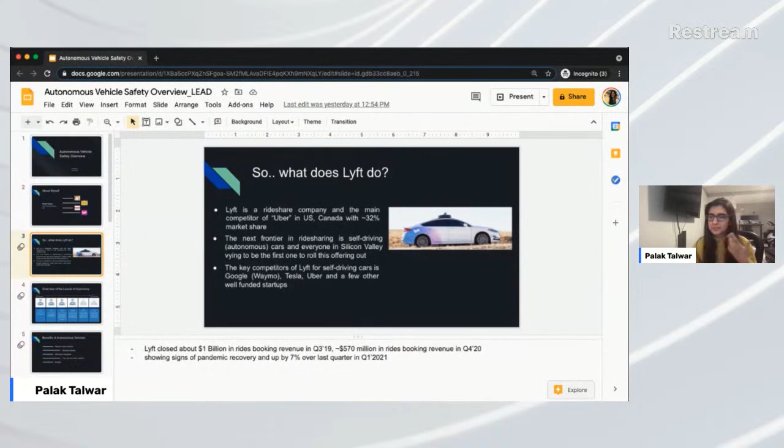Before we talk about these specific safety mechanisms and what we mean by safety, how do we implement safety, why is it important, and what key things do we have to think about for safety, I just wanted to give a little bit of introduction: what is Lyft? You might have obviously heard of Lyft. And an overview of autonomy levels, what are the different levels of autonomy, and what are the key benefits and challenges when it comes to developing a self-driving car.

So with that, what does Lyft do? The picture that you see here is actually one of the images that was released by Lyft some time back. It's a Ford Fusion hybrid, and it was released, I would say, 1 to 2 years ago. You can see that it has its own suite of sensors, cameras, lidars, radars and everything at the top. Lyft is a ride-sharing company. It started off as a ride-sharing company, and its main competitor is Uber in US and Canada.

In 2017, approximately, it started its own self-driving division, which is called Lyft Level 5. It was mainly focused on building self-driving technology and integrating it into different platforms, not building the car from scratch, but partnering with different OEMs, automotive manufacturing companies, and then integrating self-driving technology on top of it.

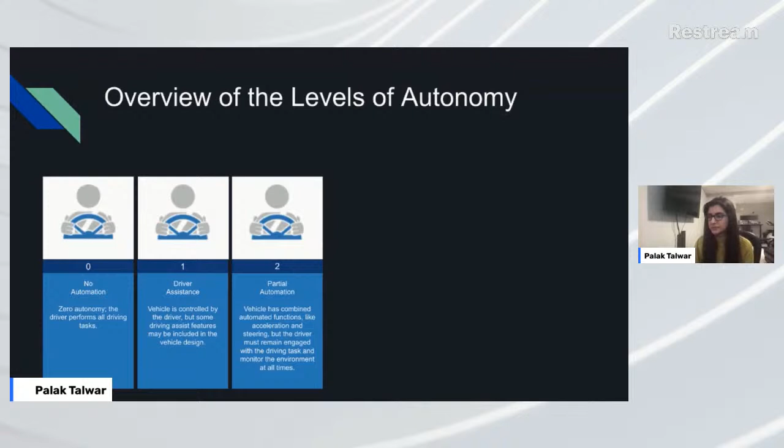High automation. The vehicle is capable of performing all driving automated functions, again, talking about steering, braking, acceleration, right? The driver has the option to control the vehicle in this case if any of the systems fail, right? And level 4 automation is a little different than level 3, because in level 4 automation, the vehicle monitors the environment in a specific ODD. When we say ODD, it's the operational design domain. It means that in a specific area or region, the vehicle is able to monitor the environment.

An example of level 4 is Waymo's Google project. For any company, for example Waymo or Google in this case, when the vehicle is ready to go on the public roads, they do a high level of rigorous testing, simulating different scenarios, to know what's the safest option in a given scenario. And when they do that, they pick a specific region or area before they commercialize it.

That area or region in which they do their testing and collect data so that they can train their system is called ODD, operational design domain. And level 4 autonomy is that: basically, you have that in a specific area or region in which you have your self-driving vehicle.

Level 5 is full automation, as you can think of. That basically is in all the areas or regions. So as compared to level 4, the only difference is that it would have all the automated functions, but in that case it would be commercialized. One of the good examples of level 5 vehicles at this moment are robotic taxis. For example, Nuro is one of the companies doing that at this moment.

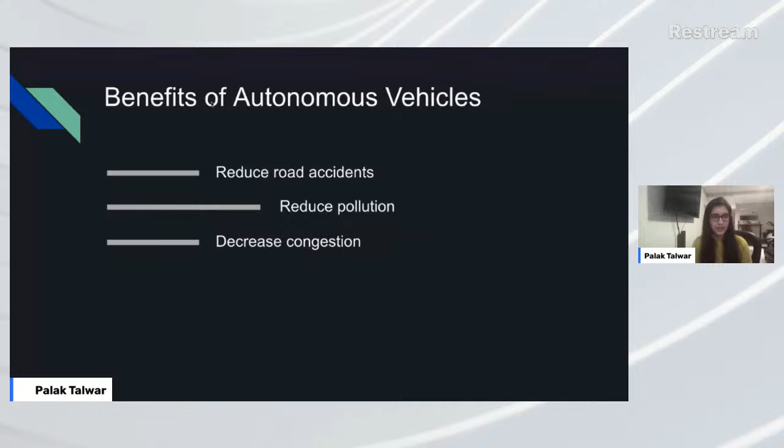Decrease congestion. Once fully implemented, a fleet of self-driving cars can significantly reduce travel time. Before this whole pandemic and COVID, I used to spend 2 hours minimum daily in traffic, one way, in California. So one of the big advantages is it's going to reduce congestion, by leveraging intelligent transportation systems that companies like Lyft use for their ride-sharing business. People can be pooled into a common ride from point A to point B, and the same car then goes to point C, picks up other people and moves on.

The other advantage would be freeing up real estate capacity. If the car is going from point A to point B picking up people, carpooling and everything, that frees up real estate capacity. Given the pressure of increasing populations around the world, especially in India, real estate is of the essence, as you would agree. If cities are built around self-driving cars, there would be drastically less need for parking spaces or parking structures. That frees up capacity that can be used for helpful infrastructure: playgrounds, parks, low-income housing, etc. Last but not least, we have mobility.

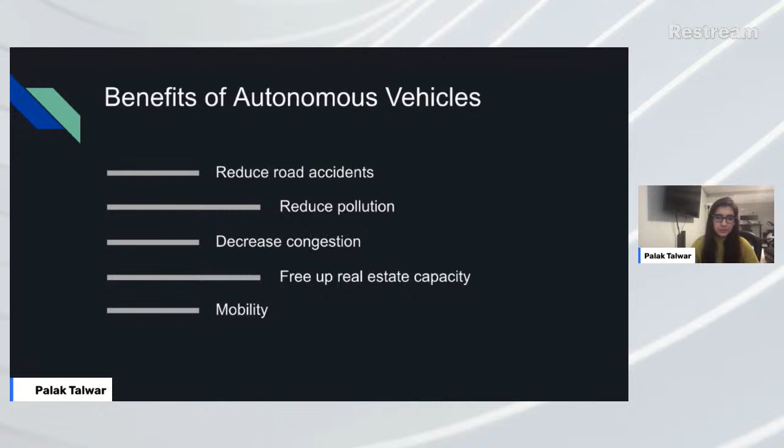So from there, we'll talk about a couple of challenges. Now, I just listed a few key challenges because I know there are so many challenges when it comes to building self-driving technology, right? But I just wanted to list out a couple here which I feel are top of the list in my mind.

One of the challenges, the first one, would be the gap between self-driving technology level and the current regulations, right? So based on the current regulations, or even based on the current infrastructure, if you talk about India itself, building a self-driving car is one thing, but commercializing or applying it in India or anywhere, even if you talk about the US, it's a big challenge, right? Because there are so many federal, local, state-related regulations that you have to be compliant with before you can release your vehicle on the public roads.

And even in this case, for self-driving vehicles, there is no such regulation at this moment because it's so new. We don't have a standardized set of regulations yet written by these organizations, in other words. So that's one of the biggest challenges that people need to think about. These first responders as well.

For example, if there is a self-driving vehicle on the road and there is an accident, then how does the first responder, which could be an ambulance or a police officer, react or approach the vehicle and gather the information from the vehicle itself, with no driver? So all of these regulations need to be in place before we start to think of commercializing this into the world.

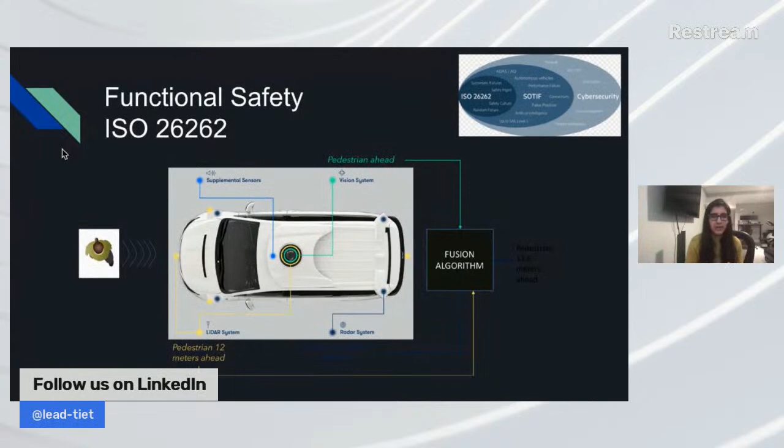It's highly possible. And then the other one, you think about how controllable the vehicle is if that happens. And that varies for different levels of autonomy. For level 2 or 3, you can imagine that there is a safety driver, and if there is an unintended acceleration, then there is a warning to the driver, and the driver is ready to take over because the driver is alert at all times. So that is maybe controllable if the driver is ready to take over.

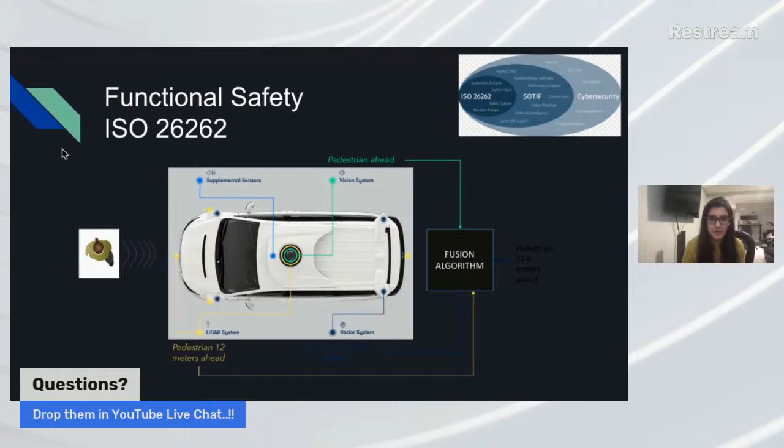For level 5 systems, for example, that's fully automated, it completely depends on the system, how safe the system is, that it's able to control that specific scenario. So it varies for different levels of autonomy.

Now, going back to the picture that you see at the top there, functional safety only applies to malfunctioning behavior of systems. It does not apply outside of malfunctioning behavior. For example, if there is a sensor, and the sensor is working fine, there is no malfunctioning behavior, but it's still giving you unintended behavior, how do you react to it? And this is where it adds complexity.

Because traditional automotive companies have been using this functional safety standard for so many years now, and it was okay to use because there is a driver in the vehicle, and in most of these scenarios the driver is able to control the vehicle. But when there is no driver, how do you define controllability of the vehicle? How do you define scenarios where the system is working fine, but because of some external factors or environments or road conditions or weather conditions like rain, snow, your sensor is not working fine? So that's the reason it adds more complexity to the system, and it requires more testing of the overall system.

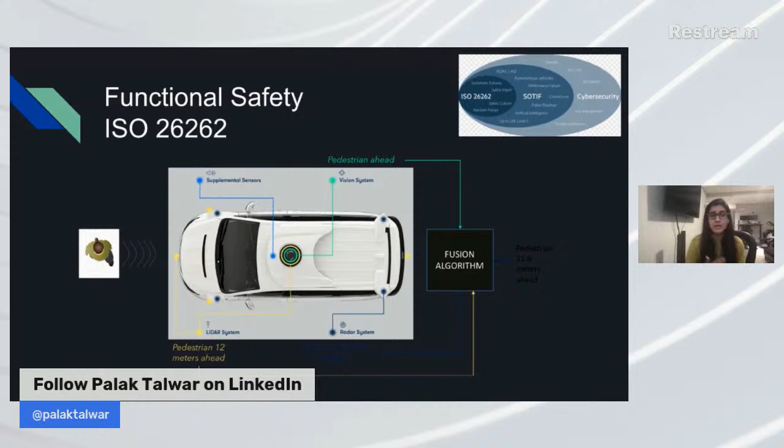Going to the definition of functional safety, I also wanted to explain it by chain of implications so that you understand how it goes from one step to the other, and how the malfunctioning behavior of something could lead to something else, in other words. So, the functional safety definition, thinking of it as a chain of implications.

Let's say there is a malfunctioning behavior of an E component, picking the brake ECU again, going back to the same example. Once you have identified what the malfunctioning behavior of that component of that system could be, you define the hazard at the top level, or the vehicle level: how the vehicle is going to behave if this failure occurs.

The next step, you find out what the risk of that harm is. Let's say there is unintended acceleration or unintended braking or hard braking because of that malfunction in the system, you define what the risk is going to be. And the risk again depends on these three parameters that I talked about before. It depends on the risk of harm to people inside the vehicle, to people outside around the vehicle, and the environment.

So it again depends on three parameters that I talked about, like the severity of the failure, controllability, and it also depends on probability, right? Occurrence of that failure. Based on these three parameters, you define your risk level. Again, if you go back to the functional safety standard, it exactly tells you based on these three parameters, if you pick XYZ for these three parameters, this is what your risk level is going to be.

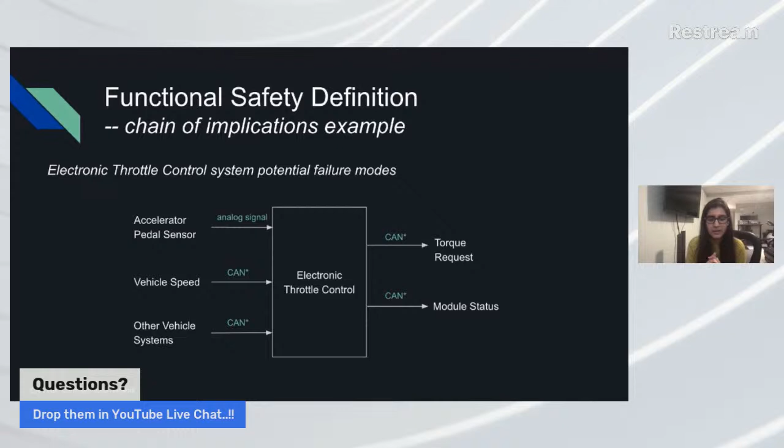So, based on this ECU, and I'm looking at the chat as well, what different failure modes can you think of that could lead to unintended torque request, invalid torque request, no torque request at all, or delayed torque request? Because if you're expecting it to be sent at some frequency, x hertz, for example, and it's not sent at that specific frequency, if it is delayed, what is the impact of that delay to the overall system?

So, a couple of failure modes. One of the failure modes there would be that the signal is out of range. Now, the driver presses the pedal, the accelerator pedal sensor. You get the analog signal. You read that analog signal, because based on that, you decide that there is a driver intervention. Let's pick level 3 autonomy, just as an example.

For level 3 autonomy, to go back to the previous slides on different levels of autonomy, all the critical functions like steering, braking, and acceleration are automated. And the driver can just sit back and relax, but obviously be attentive and able to intervene when there is any failure or any warning to the driver on the dashboard.

But in this case, for example, if there is a failure or a fault, or if the driver monitors the environment and sees that, okay, I need to either accelerate, I need to stop, or brake, it needs to press the pedal. So if there is a pedal press, you get the input to the ECU and you get the notification that, okay, driver has pressed the pedal. This is an indication of disengagement. That means we need to get out of autonomy, right? And based on that information, you set your torque request, right?

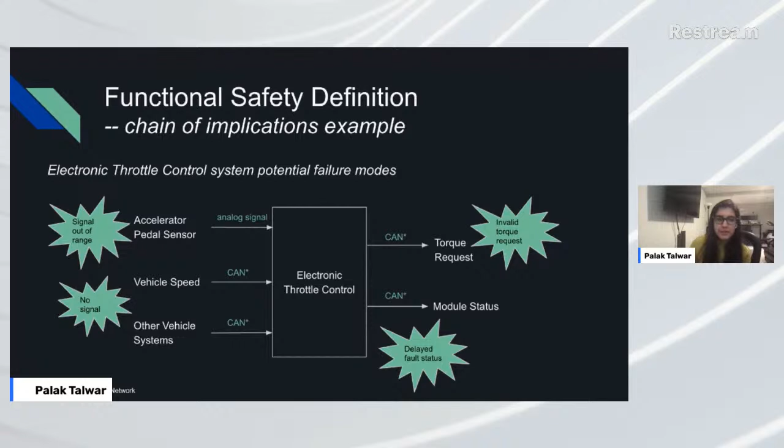In this specific example, we have talked about failure modes, and we know that it could lead to a bunch of these failures. We could also have delayed fault status, right? How do you address these failures? Some examples, on the same diagram: one of the things that you can do is add an additional sensor, right? So if sensor one is giving you invalid input, you don't have another way to verify that information. By adding a redundant sensor, you can verify your information with another sensor, and you can be sure that this is a failure or this is not a failure, right?

In this case, for example, the way the logic works in the ECU is that you get analog signal information of voltages from these two inputs. And then let's say there is a specific ratio that needs to be maintained between these two sensor inputs, let's say 1:2 or 1:3 or 2:1, whatever. And if it's not within that specific ratio, then you know that there is something wrong, right?

So you add an additional sensor just to be sure. If one sensor fails, it depends on how you define your architecture. Either you depend on the ratio, or you can add a completely redundant sensor. In other words, if one sensor fails, you have a backup sensor that you can fall back to, right? So you can ignore the first sensor because there is a failure, but you can fall back to sensor two and get that information instead of taking a drastic action because of sensor failure.

You cannot take that and you can rely on another sensor and continue driving, basically. And there are some other mechanisms that you can add on the output side, right? You can compare inputs from these two sensors, as I just talked about, to know if one of the sensors fails, then you know that there is a fallback, right? A fallback mechanism. You check for message corruption on the output.

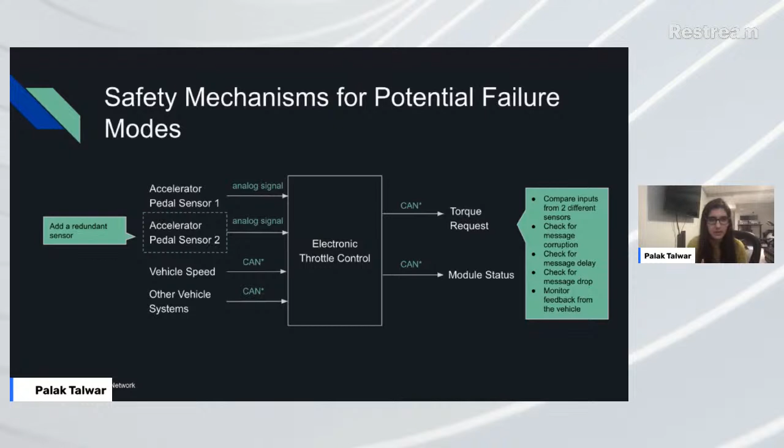So this was functional safety. Functional safety is very specific to identifying different malfunctioning behaviors of the system, as I talked about before. But if you take one step up, for AVs specifically, autonomous vehicles, functional safety is not enough, right? Because of this added complexity of the autonomy stack, you need to talk about different limitations. Going back to the previous example, what if there is bright sunlight on the camera lens? The camera is working fine.

There is no failure in the sensor itself, but because there is bright sunlight falling onto the lens of the camera, it's basically giving you unintended output, right? So it's outside of its limitations. Another example would be weather conditions. For example, if you're driving in rain, and the camera or any other sensor is not able to gather information, again there is no failure, but because of environmental or external conditions or limitations, the sensors or the autonomy stack are not able to give you the correct or intended output.

How do you make sure that you've captured all of these cases or scenarios? That's why we have SOTIF. SOTIF is another standard. I didn't want to mention SOTIF there because there are so many standards. But if you look at this diagram at the top right, SOTIF, safety of the intended functionality, is a standard which captures all of these extra scenarios on top of functional safety, use cases, corner cases, for example, based on which you can simulate different scenarios or use cases, and you can test your vehicle, right?

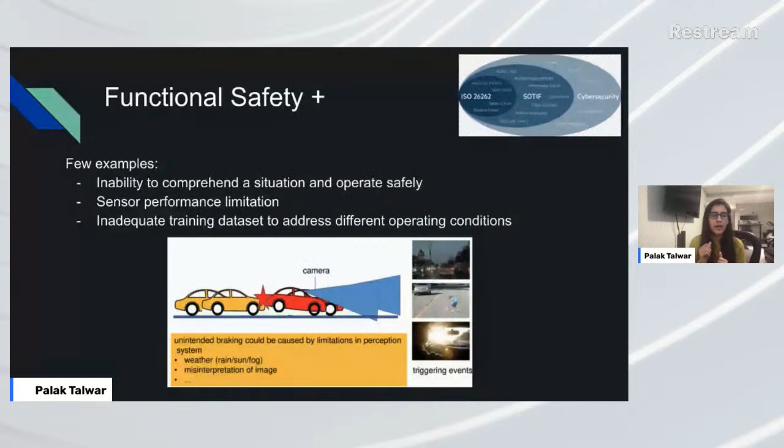You can try your best to run millions and hundreds of use cases or corner cases based on your judgment, based on the standards that are there already, SAE and IEEE, or even the safety organizations that they're working on. But you can do your best from your side, but you can't be sure that you have covered 100% of these cases, right? So this is where that complexity and challenge falls into. Like, how do you get to that 100%? How do you measure safety, right? How do you make sure that you've reached 100% safety?

And the final one, as you look at this diagram again, is the last pillar, other pillars of safety apart from functional safety and SOTIF, where it talks about different limitations of these sensors or technology limitations. It talks about different areas or aspects as well. So cybersecurity is one of the bigger challenges as well when you talk about these AVs. Not at the moment, but moving forward, when you start to commercialize it, you can think of V2X communication, vehicle to vehicle communication, or vehicle to operator communication, backend operator communication. And cybersecurity falls basically under that area. So that is again one of the challenges and the areas that needs to be addressed and thought about.

Regulatory requirements, we already talked about the challenges, and how we see that the current infrastructure does not support the development of AVs. So what needs to be done? And again, this is unknown because we don't have a set of principles or guidelines which tells us what needs to be done to support, for example, the development of AVs.

And last but not the least, I just picked key pillars of safety here: comprehensive safety simulation analysis. This is again going back to the previous two examples. All of this is interlinked, basically. You think of different simulation corner cases or use cases that you have to run to get to a point where you can be confident enough that your vehicle is safe enough to be driven on public roads. Because it's not just the company, it's also different organizations or boards outside that need proof from companies in the form of test data or a safety report, for example, that shows you have done enough from your end to show that the vehicle is safe enough to be driven on public roads.